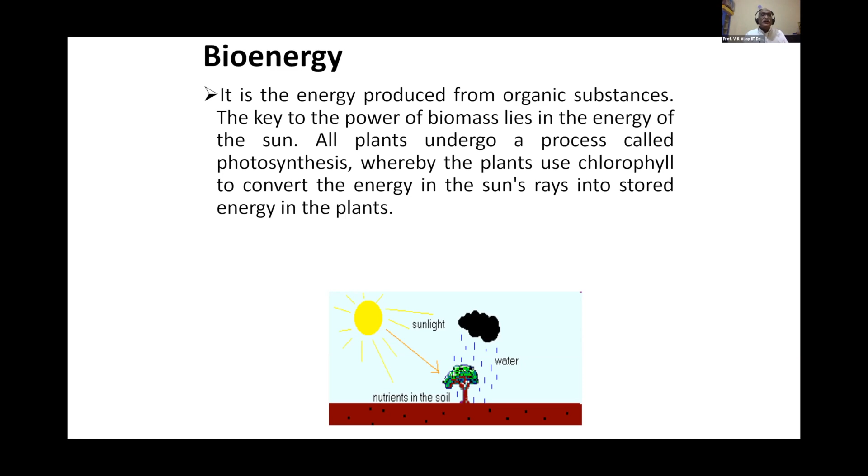All plants undergo a process called photosynthesis, whereby the plants use chlorophyll to convert the energy in the sun's rays into stored energy in the plants. And plants we utilize for our food and nutrition. Plants we utilize for energy applications. Plants we utilize for burning and getting energy. So when I talk about biogas, all these organic materials can be utilized for biogas production.

And India has slot number one in the world in total animals. So we have the highest cattle population in the world, that is nearly 300 million. So cows, buffaloes, bullocks, hogs, and they are able to produce nearly 350 million tons of manure, and they are able to generate nearly 6.38 × 10^10 cubic metres of biogas from the cow dung which is produced in the country.

And till now, nearly 5 million biogas plants have been installed in the country. When I say 5 million, it means we have 7 lakh villages. So on average, every village should have 7 biogas plants. In the last 40 years, 41 years, from 1981 onwards, nearly 5 million biogas plants have been installed, and subsidy was given by the Government of India. Out of these 5 million biogas plants, how many plants may be working?

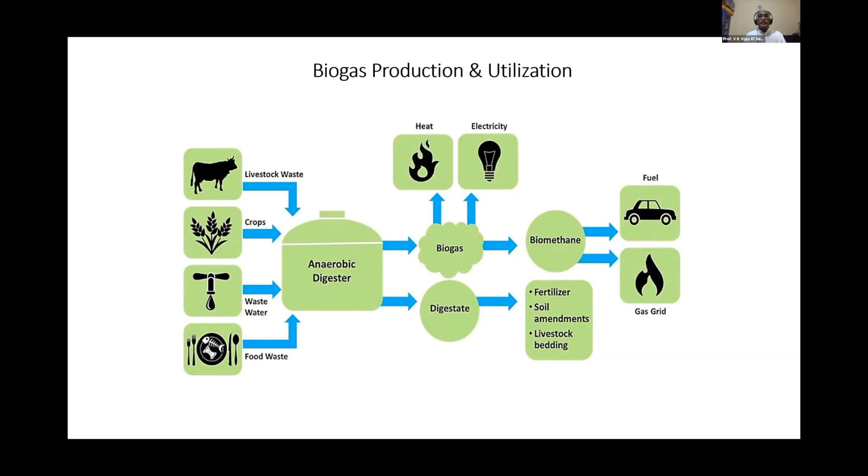And that CBG can be filled in our vehicles, in CNG vehicles, and it is a good quality transport fuel. In Delhi, it is compulsory that all the vehicles should utilize either CNG or petrol. All the diesel buses were converted into CNG 20-30 years ago by the order of the Supreme Court. And then it can also be injected in the natural gas line, methane gas line, and can be utilized for supply of fuel. Then manure is a good quality fertilizer and can be utilized.

So if we see the biogas production, this is an anaerobic process. It means it is produced in absence of air. There are some bacteria. So any organic material generally contains carbohydrates, fats, and proteins. And with the use of hydrolysis bacteria, these complex compounds are converted into simpler compounds like sugar, fatty acids, and amino acids. And then another kind of bacteria, acidogenesis, converts these materials into carbonic acid and alcohol, and hydrogen, carbon dioxide, and ammonia.

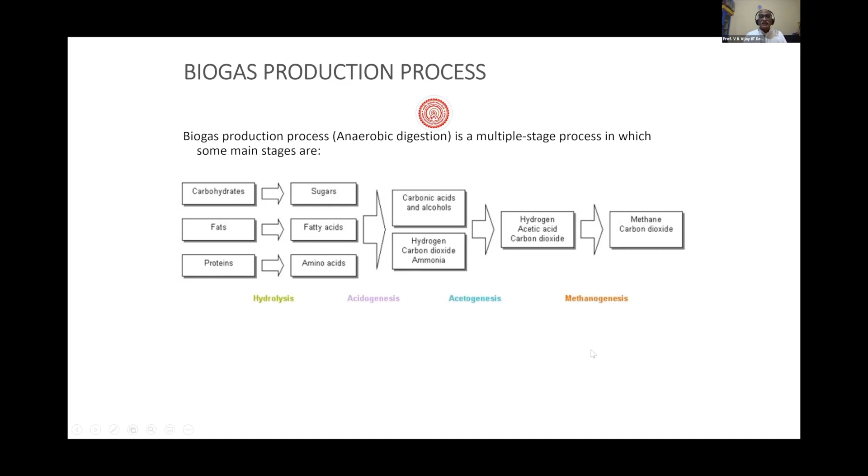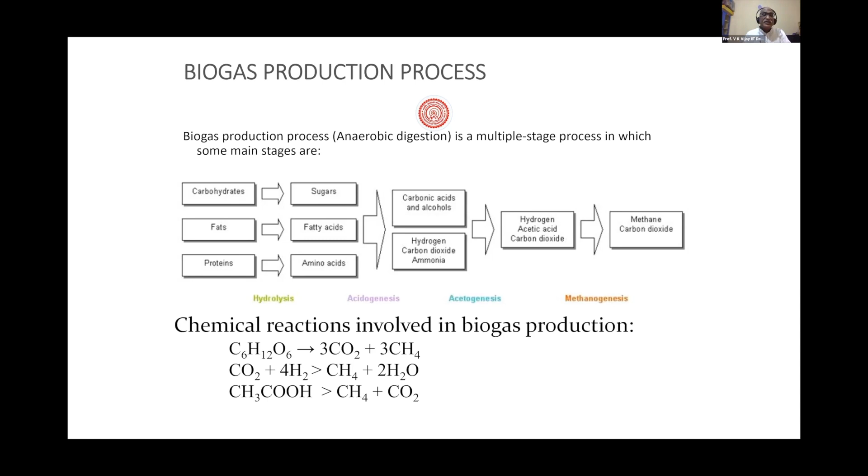Then comes the acetogenesis bacteria, which convert all these acids into hydrogen, acetic acid, and carbon dioxide. And then finally, methanogenesis bacteria convert these gases into methane and carbon dioxide. So all these equations take place inside a biogas plant, which we call a biodigester. And then the equations are like this for biogas production. Cellulose or hemicellulose converted into carbon dioxide and methane. And finally, CH3COOH converted into methane and carbon dioxide. So these reactions are taking place inside the biogas plant.

And the quantity, rate, and composition of biogas production from any organic material depends on these parameters or factors. These are the pH of raw material, it should be neutral. Temperature of the environment, it should be mesophilic or thermophilic temperature. Total solid content in the feed material, your cow dung is 20% solid content, but you should have about 10% solid content, so you add water.

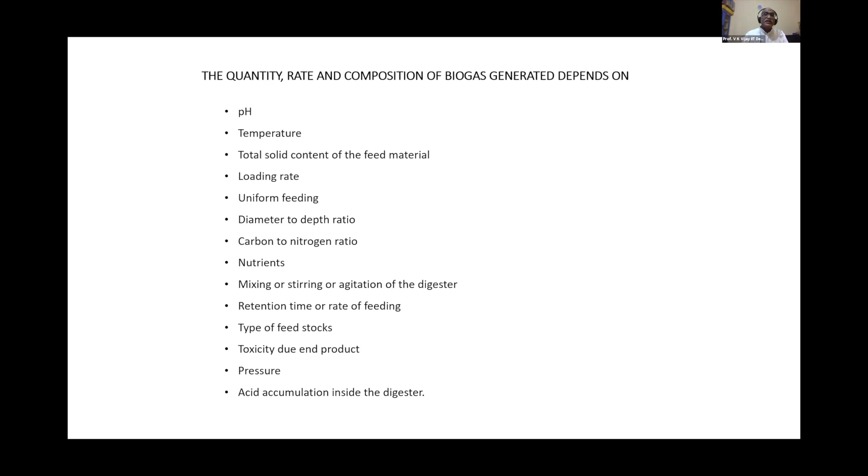So likewise, all these parameters are dependent for biogas production. If we see the optimum factors of these parameters, temperature should be in mesophilic range, 35 to 37 degrees centigrade. Carbon to nitrogen ratio should be 30:1. The pH should be normal, neutral, and it should not go beyond 6.8 to 7.2. Solid content should be 10%, and there should not be toxic materials, harmful materials to bacteria in the digester.

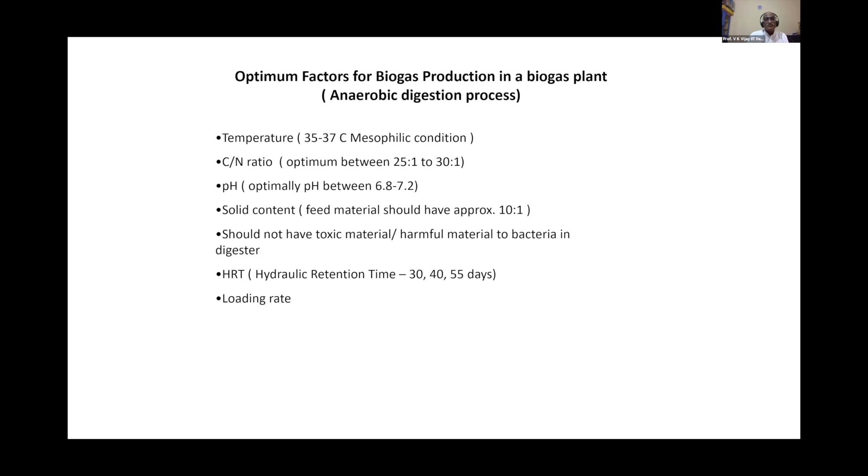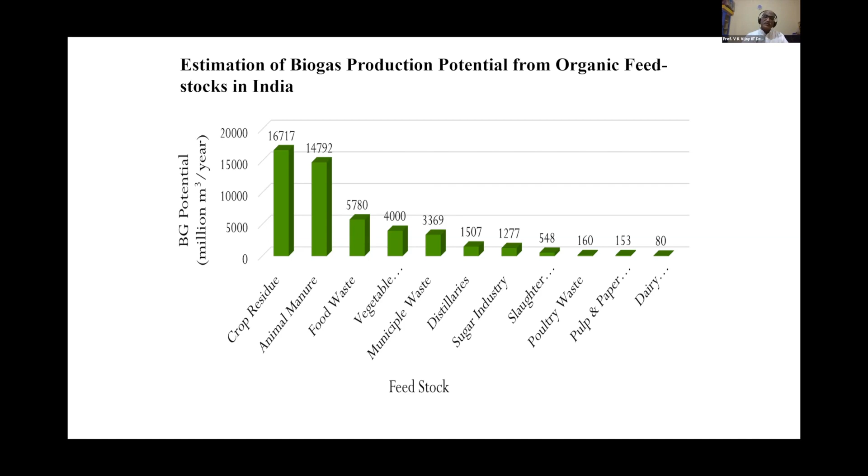Likewise, estimation of biogas production potential from organic feedstocks in India. And there are many materials that can be utilized for biogas production, whether it's crop residue or animal manure, food waste, vegetable, municipal waste, distilleries, sugar industry, slaughterhouse, poultry waste, pulp and paper and dairy. So all kinds of waste can be utilized for gas production.

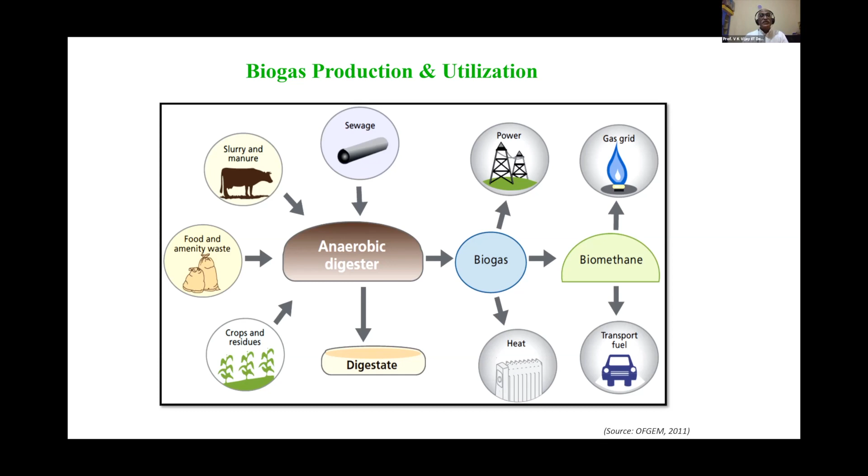And earlier I showed one slide that various kinds of organic material can be utilized for gas production, and gas can be utilized for cooking, lighting, heating, vehicular application, etc. And the manure or fertilizer, biofertilizer, is very good for organic agriculture production.